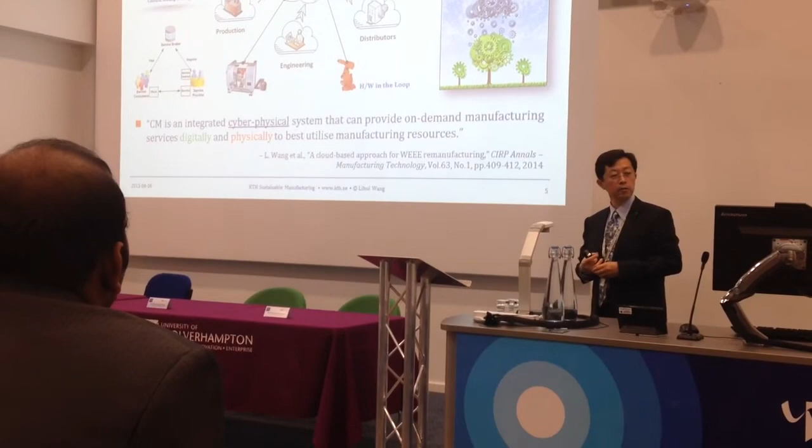So if I give a definition about the cloud and the cyber-physical system, my definition would be: cloud manufacturing is an integrated cyber-physical system that can provide on-demand manufacturing services digitally and physically to best utilize manufacturing resources.

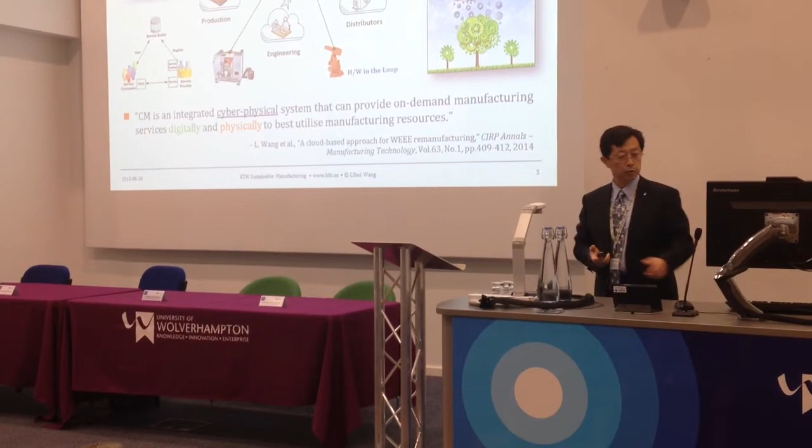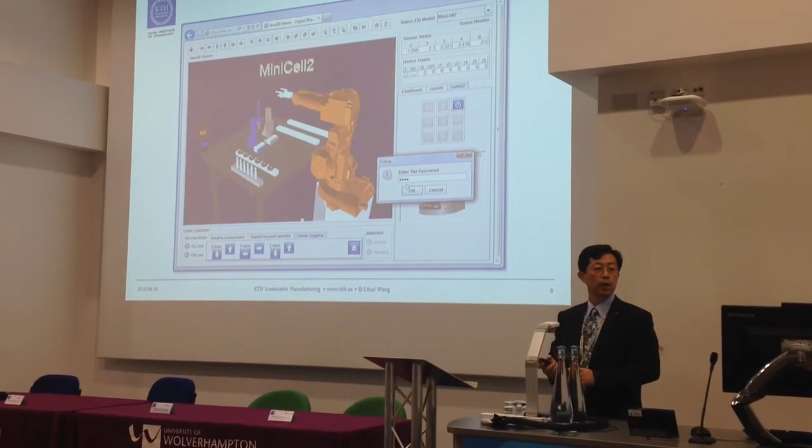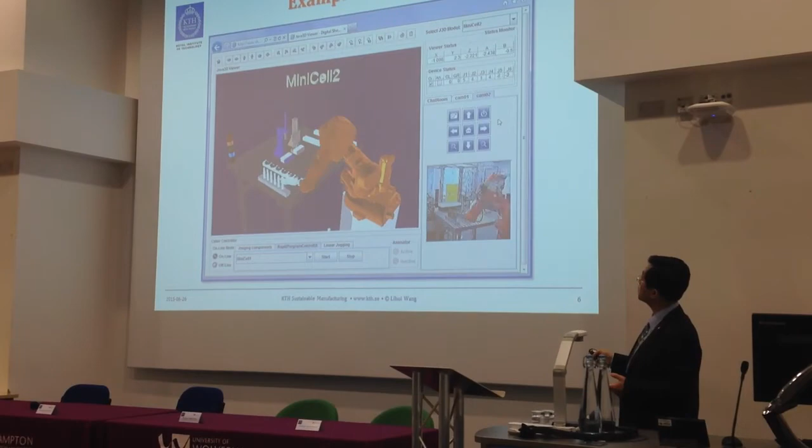So now I provide some examples to see how cyber-physical systems can provide value to you. One example is remote monitoring. Normally we use a camera to do remote monitoring, but it contributes to network congestion. In this case, perhaps we can use a 3D model to monitor the real environment.

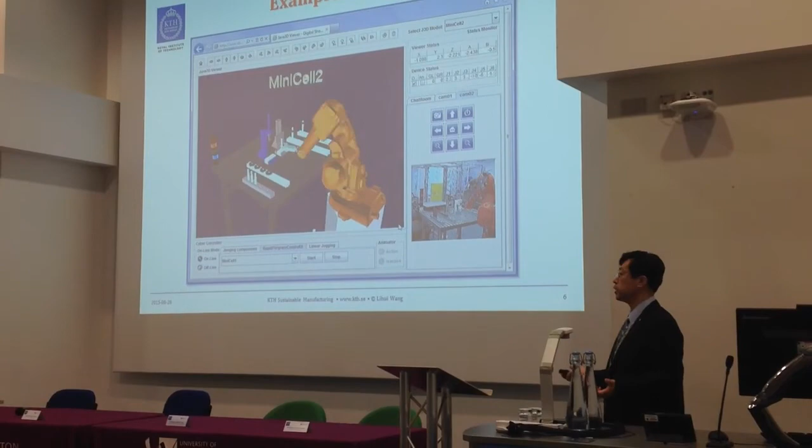Here shows the physical shop floor, and here is somewhere in the cyber world. You still can do the same thing if this model is driven by real-time sensor data. So that's the difference: the cyber-physical system can make internet a real-time application for you.

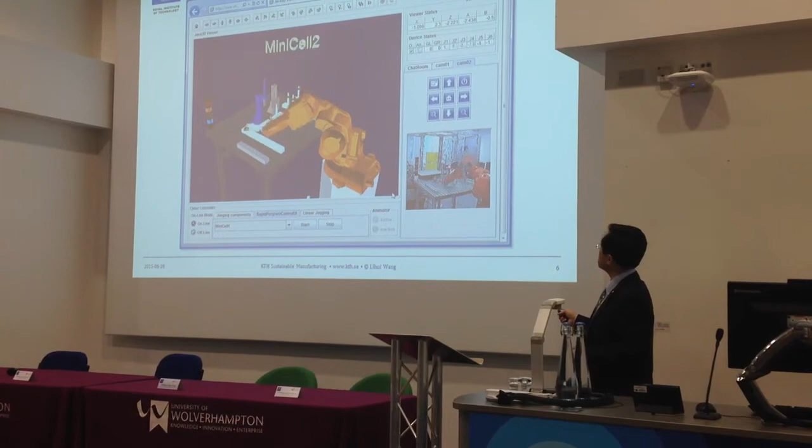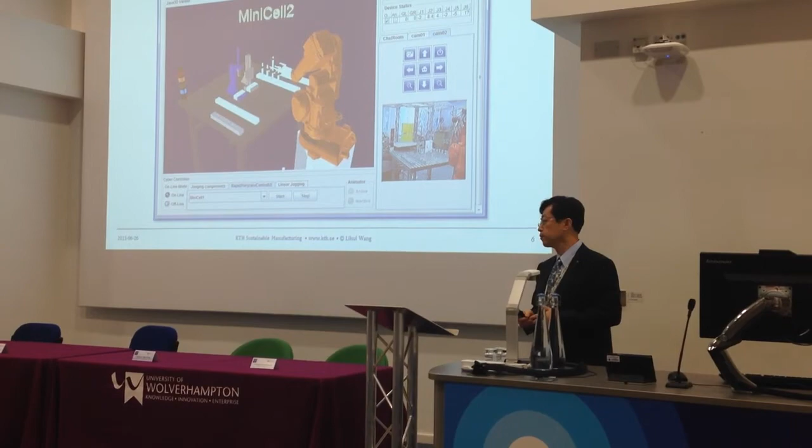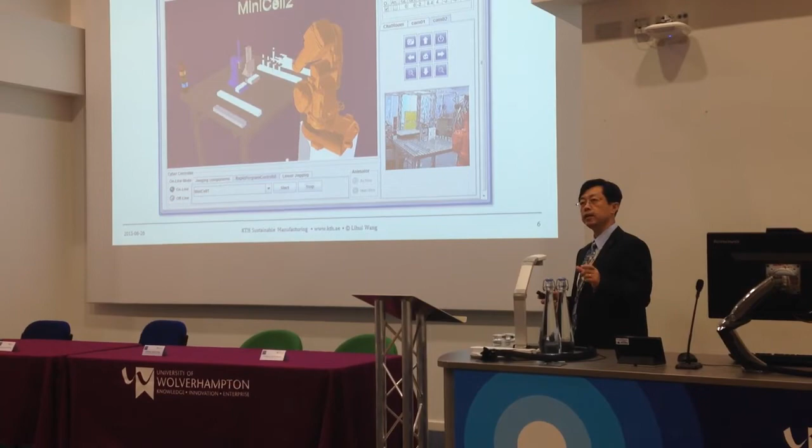If I just use a camera to monitor the same shop floor from thousands of miles away, the image is largely delayed and discontinuous. If you base control on delayed information, how can you do real-time control? It's impossible. But this way, you only need to send very limited data to drive a 3D model, and the 3D model is rendered locally. You can do real-time monitoring and remote control.

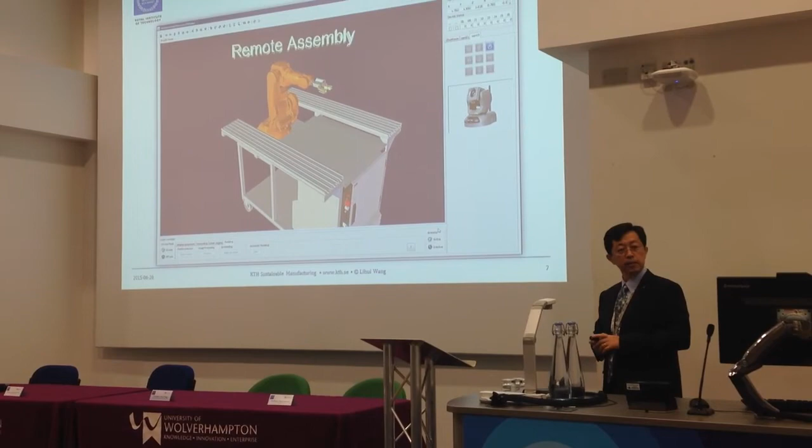Second example is remote assembly. In the previous task positioning I mentioned, if we use the internet and the cloud to do remote planning and remote machining, eventually you need to come down to remote assembly.

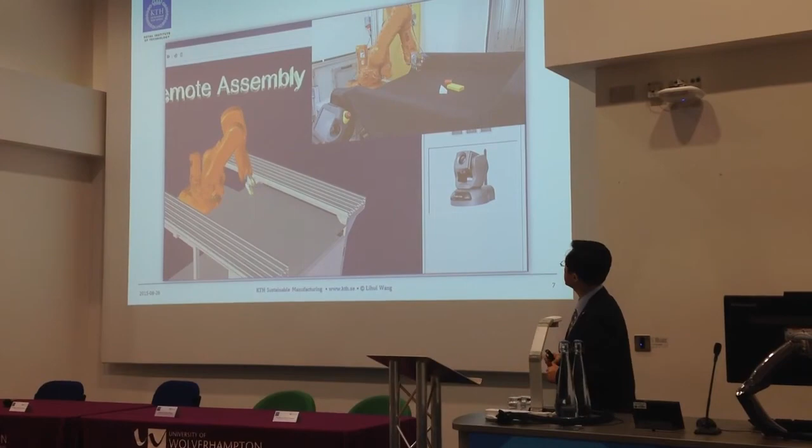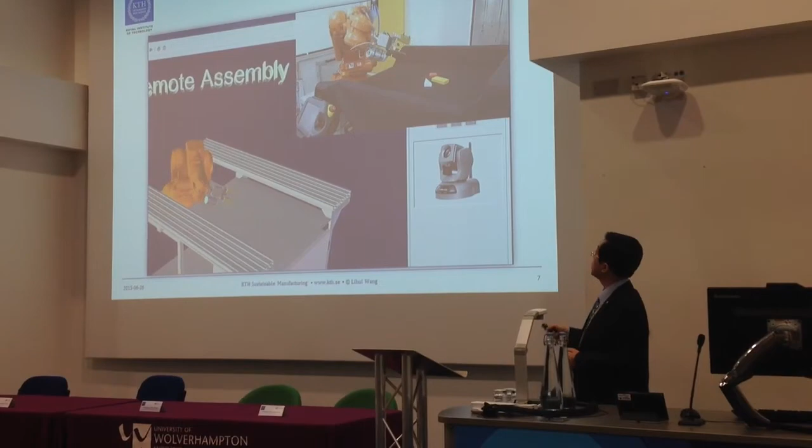There is a need. Even though this robotic cell can be modeled, there's an unstructured environment like this component that you cannot model all at once. The approach is you put some cameras here, take a few snapshots, and the information is sent to the cloud over the internet to generate a 3D model.

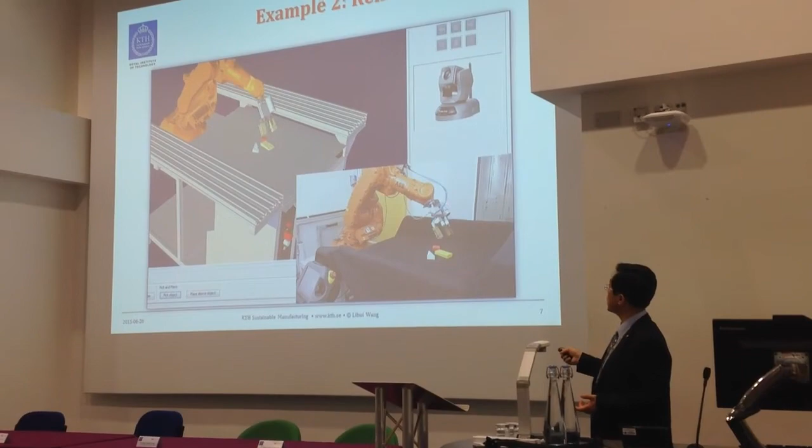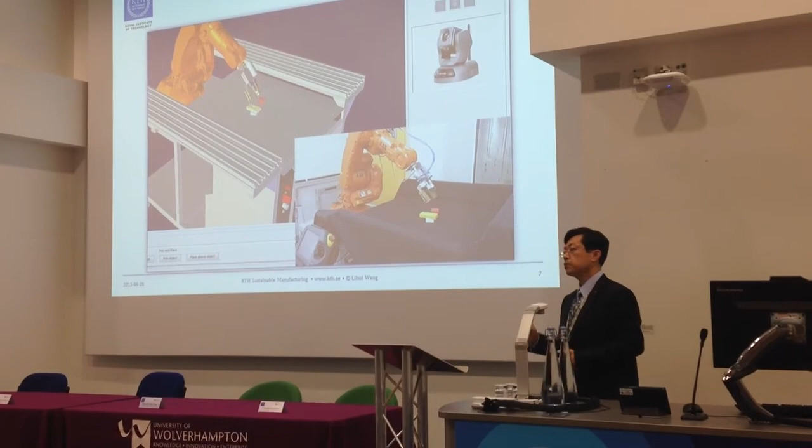The rest you can do just based on the 3D model to do the assembly without looking at the camera scene. But for comparison, we put a camera image here, and you can see the robot actually mimics the operation of the virtual world. So everything is connected. We can say this is the Internet of Things.

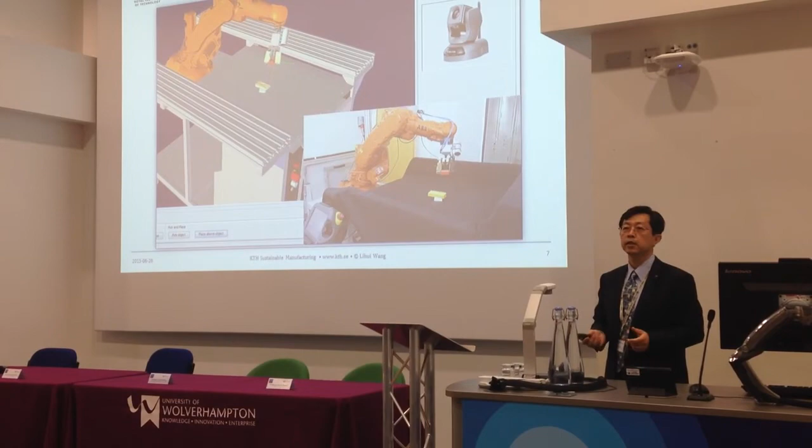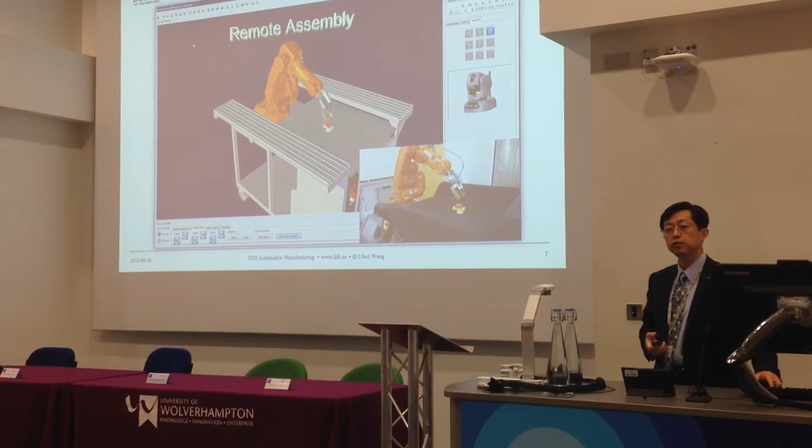We can say it's cloud robotics, or we can say this is a cyber-physical system. In this mode, only control code is sent to the robot controller, but when you turn on the camera again, everything is assembled. This is a simple example, but it shows what's capable in the future if we increase the complexity.

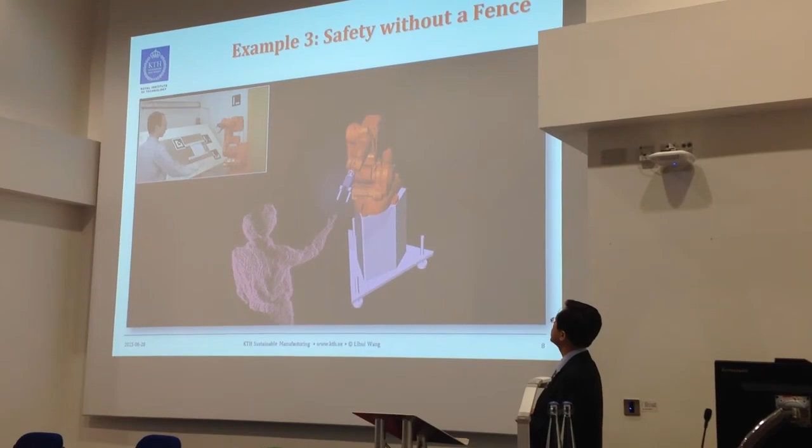I mentioned the human needs to be in the loop in order to contribute to this cyber-physical system. Safety is a major issue we need to address. Normally, we put a fence around the robot to make the robot safe, or to make the human safe. You can argue from different perspectives.

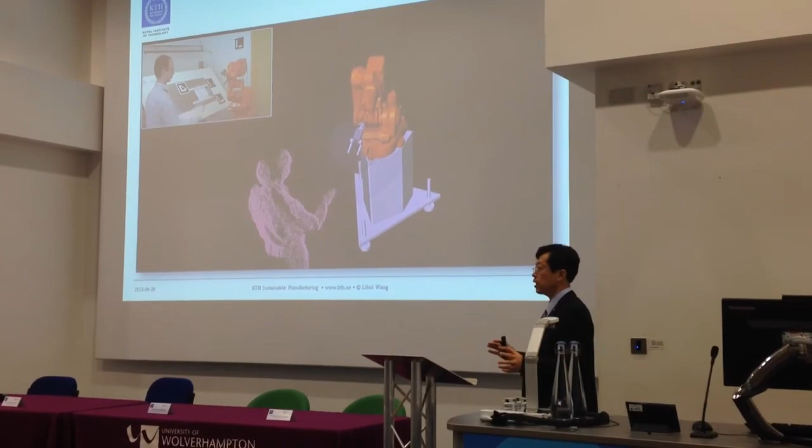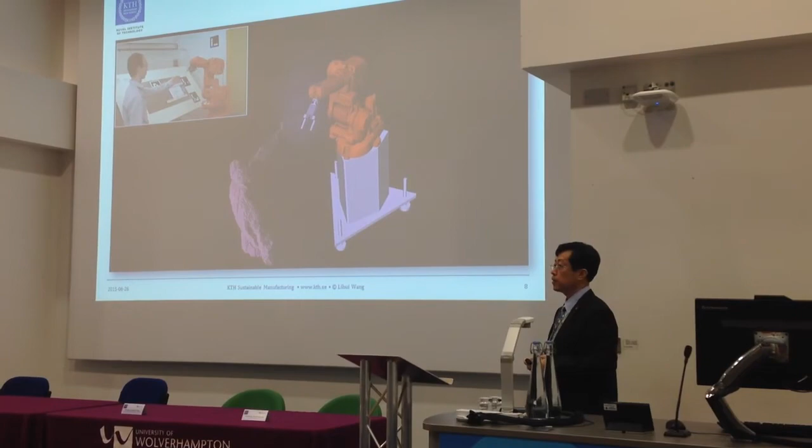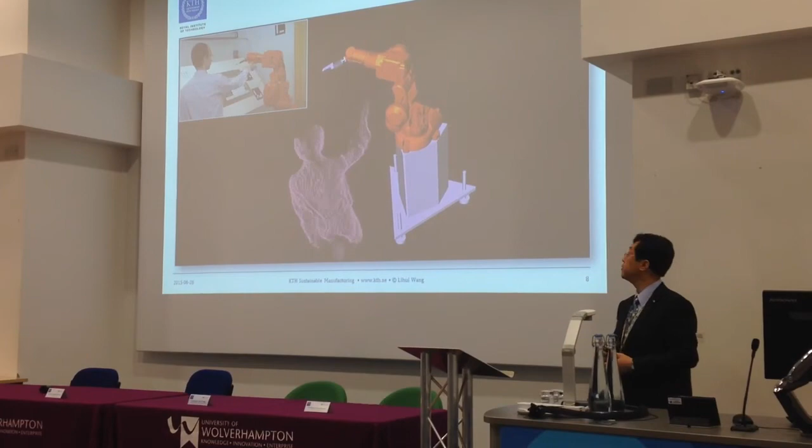But what happens if we remove the fence? We put a human inside the fence, and they can play together. You may recognize this individual, Bernard, sitting here. He's a brave guy. First, he invaded the robotic cell, and everything worked well. So his work mainly is to play with the robot.

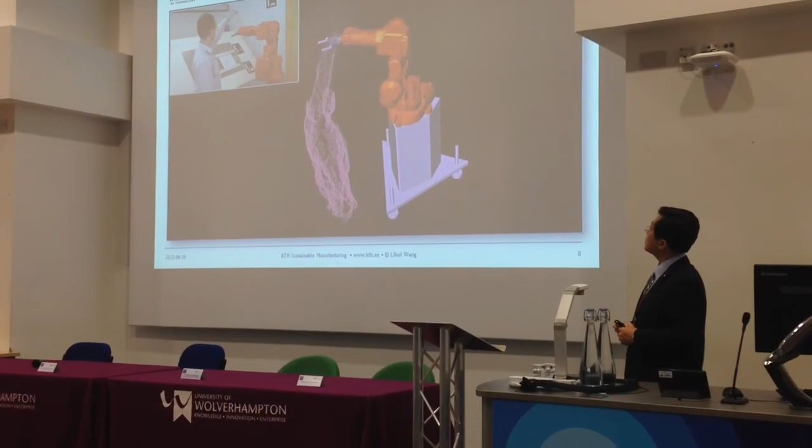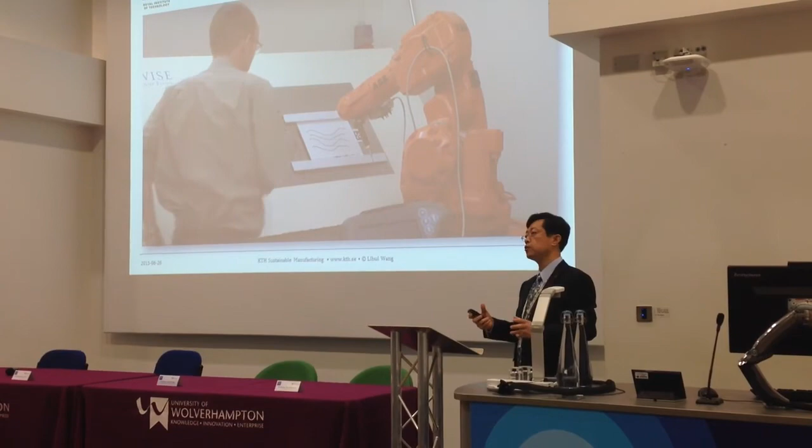From this video, you can see that without touching the robot, you can actually manipulate the robot. The robot can sense your demand and try to move away, or you can change the configuration, change the safety policy, and the robot will follow you. So that's a different strategy you can use.

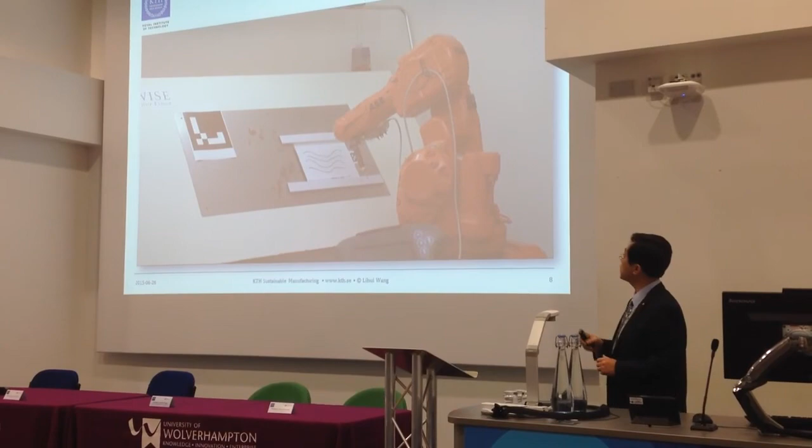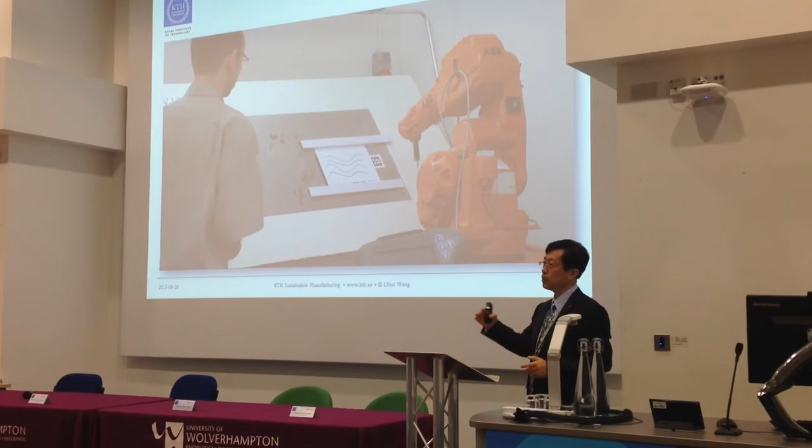This way is interruption: if a robot is doing something and you go there, you interrupt the robot's operation and it moves away temporarily. But once the environment is safe and clear, the robot will move back and continue what you do. Conventionally, if a human moves to the robotic cell, you trigger an emergency stop, and everything needs to start from the beginning again.

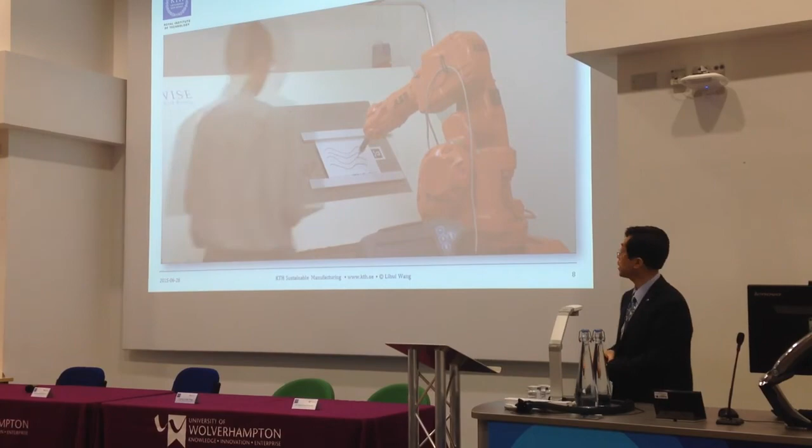That's my 10 minutes, almost done.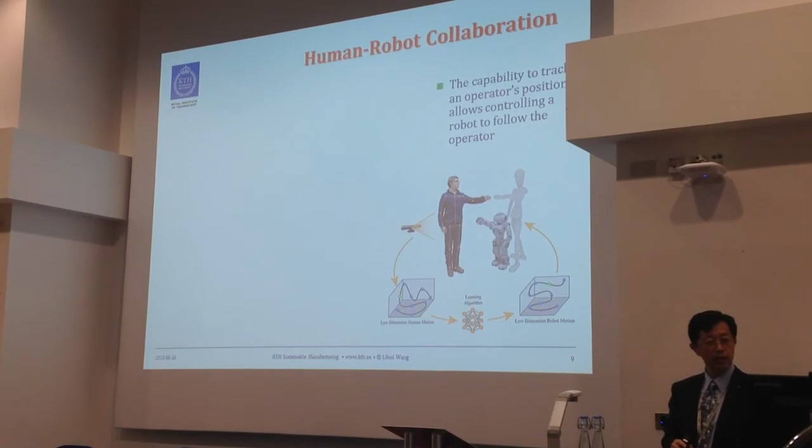So last two slides, let's just do two very quickly. Human-robot collaboration: the human can be at the center of the loop, and we need to remember automation can never replace a human.

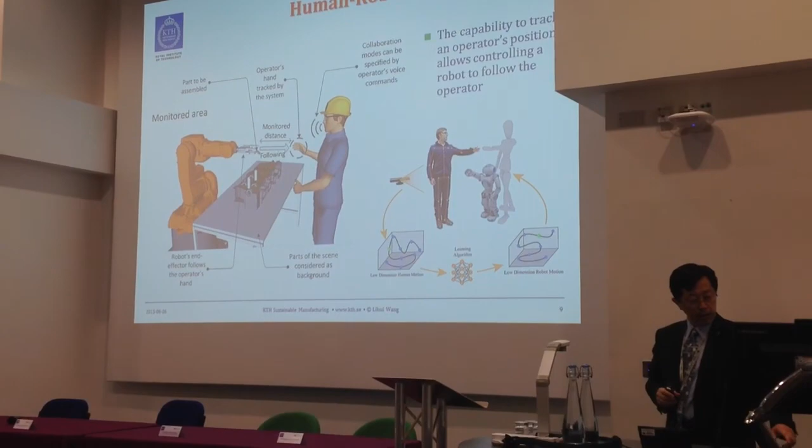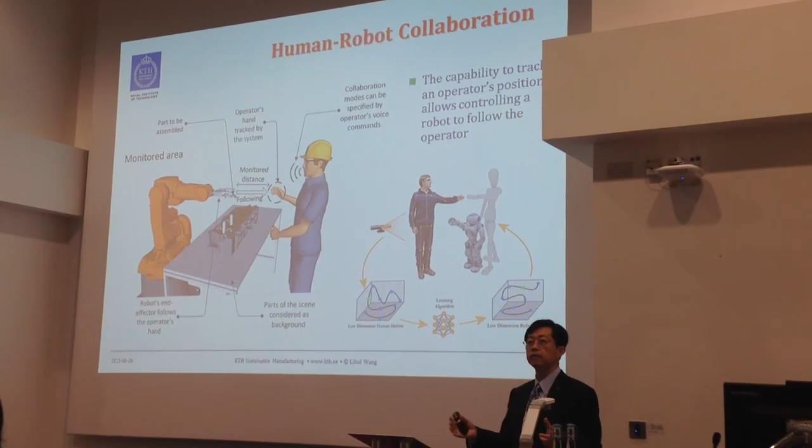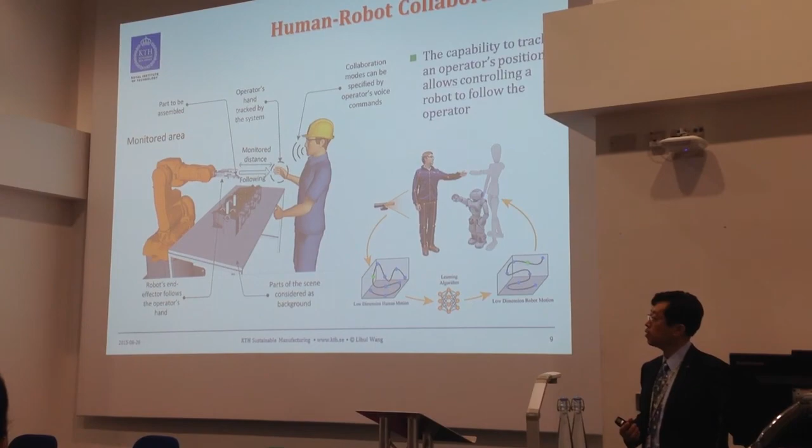In this mode, humans can command the robot through several ways. You can talk to the robot, use sign language to direct the production in the robotic cell, and also use gestures. All those can combine together without really controlling the robot using code. You can communicate with the robot. That's the future cyber-physical system as well.

So cloud robotics is to use cloud AI, and different robots can share the same wisdom. Thank you very much.